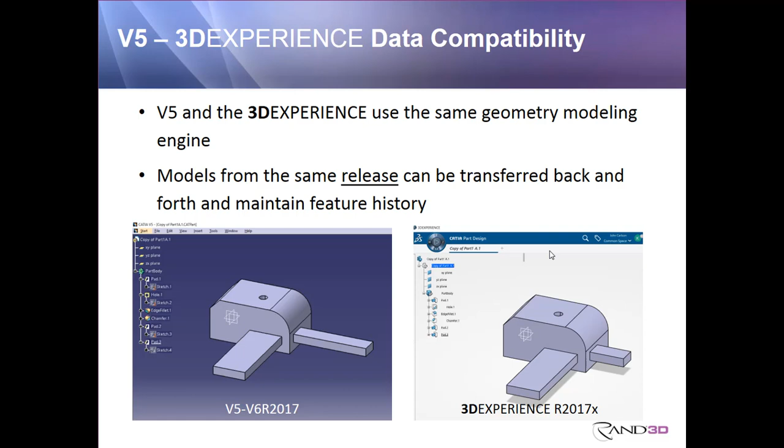Let's talk about on-premise first. With the on-premise method, basically everything is installed locally at your company - the software itself, the database you're using, the hardware, that's all within your company. That would be one way to do it. With that, though, you do have to set up everything, and it takes a little bit of time and effort to do that.

With the public cloud, basically everything is out on the web, so there's really no software that you need to install. Well, you have to install the thick client software, but you can download that right off the cloud when you need to use that part of the software. So there's really nothing you need to do beforehand - you would just log into the 3DEXPERIENCE. You're going to use the internet to access the public cloud, so everything is taken care of for you in the background.

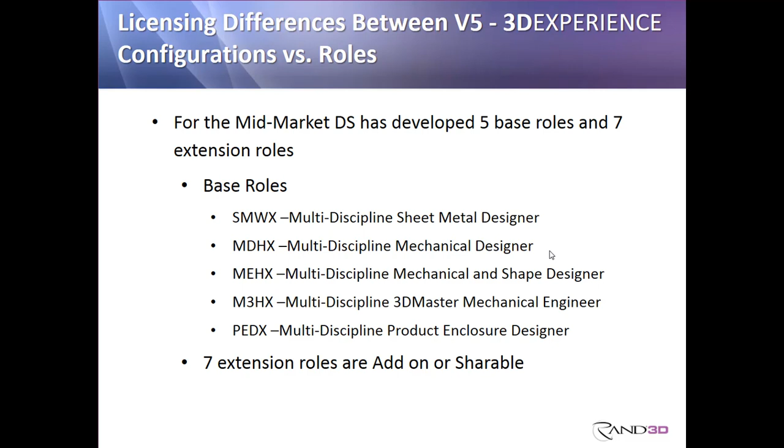And then from there, there's also going to be extension roles. So I could have an extension role for a tubing designer, or an extension role for electrical stuff added on top of those if I wanted to. I didn't list those 7 roles, but there are other ones you can add on top. These 7 extension roles can also be add-on or shareable on top of the base role as well. So you're still going to have the trigrams, but it's now going to be roles versus configurations that you bought in the past.

And then the next thing I want to do is give you a quick software demonstration. How does this software look compared to V5? You'll see there's quite a few similarities, but there's also going to be some differences as well. So let me bring that up here real quick.

I've actually already got CATIA started here in the background just to save some time. Now again, to get into the 3DEXPERIENCE platform, I have to specify a web address, and then it's going to ask me to log in. Once I log in, it would bring up the 3DEXPERIENCE. Now I'm in the thick client part of the software because I'm actually in CATIA right now, and you'll notice I do have my compass up here in the corner that I was talking about.

So again, if I wanted to switch the area that I was in, if I come over here and hit the 3D button, that's going to bring up, over here on the side, where I can choose my different 3D modeling apps. You'll also notice on the side panel I've got my different roles assigned to me. If I go under business innovation, here's the different apps I can access under that role. If I compress that back and go under mechanical designer, here's the different apps I can access as mechanical designer. So it will always give you a list on the side of the different roles you potentially have and what you can access.

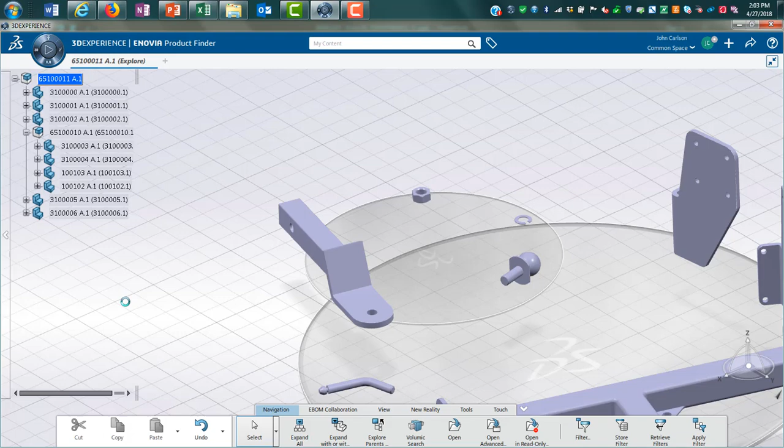Now you'll notice I've got a sub-assembly over here, which is this part. If I expand that as well, it would further expand that out onto the turntable. So I can break this down under Explore and really view the information. Then if I decide I really want to make some type of change, at that point you could open it. If I come over here and compress this, that would put these back together. This is not expanded out.

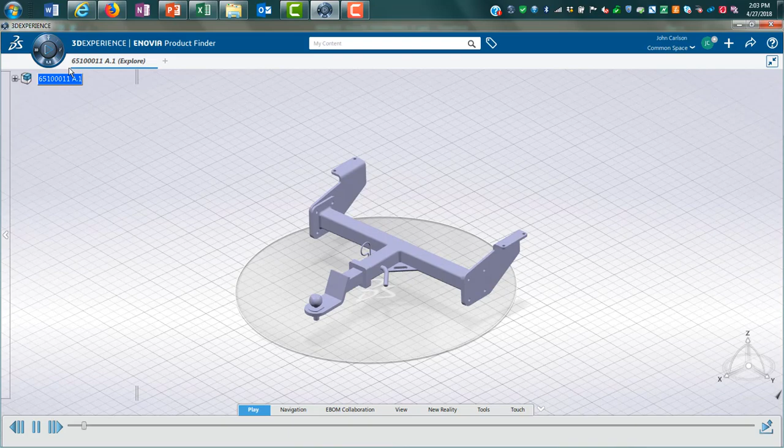So you get Explore options that you really didn't ever have in V5. Also in the very center of the compass, there's a 3D play button. If you're looking at something and you hit the 3D play button, it's going to play through the different orientations of this model to give you a better idea of what this particular item looks like. I can stop that at any time.

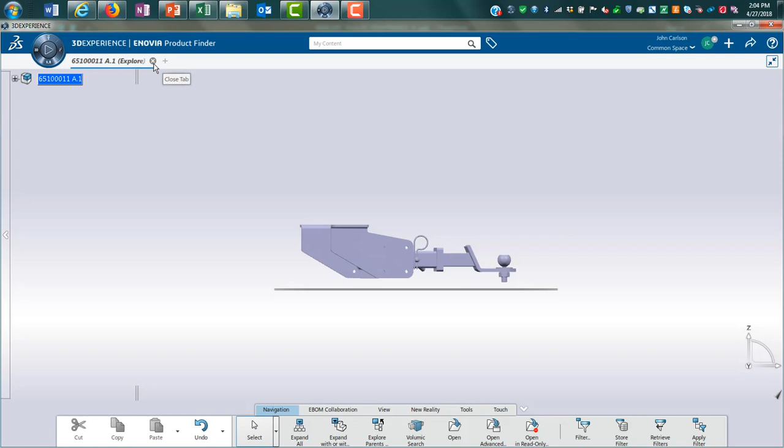Now I'm finished with this. Okay, I explored this, I looked at it, don't need to see it anymore. So I'd really just come up above and close that tab.

Now, if I want to create a brand new file in the system, I've got a couple different ways to do it. One is I could come over here and use my compass, and come down here and say I want to make a part. That would build a brand new part. Or I could just come up here above with the plus button, and create a model that way. So I want to go through and create what they would call a 3D part, and that's going to start a brand new model at that point.

And you can see once I get the model started, I still got the 3 default datum planes. I've got my specification tree on the side as before. And then down below, the interface has changed quite a bit. I do have various tabs down below here to find the different commands.

So if I'm over here under the Essential tab, these are kind of the essential commands inside of the 3DEXPERIENCE platform. If I come over here under Model tab, here's my main model tabs. If I come over here under Refine, that's where I'm going to find chamfers and edge fillets, those different commands. So it's really just a matter of going to the correct tab to find the command.

Now, some of these things are found in multiple locations. Like if I come over here under Essentials, I'm going to find the sketch command. I would also find that here under Model as well.

So let's just say I want to make a simple feature here. I'm going to go through and make a sketch. I'm just going to hit the sketch button down below, and that's going to start making my sketch. Once you get into the sketcher, you'll notice your choices are pretty much the same as you would see in V5.

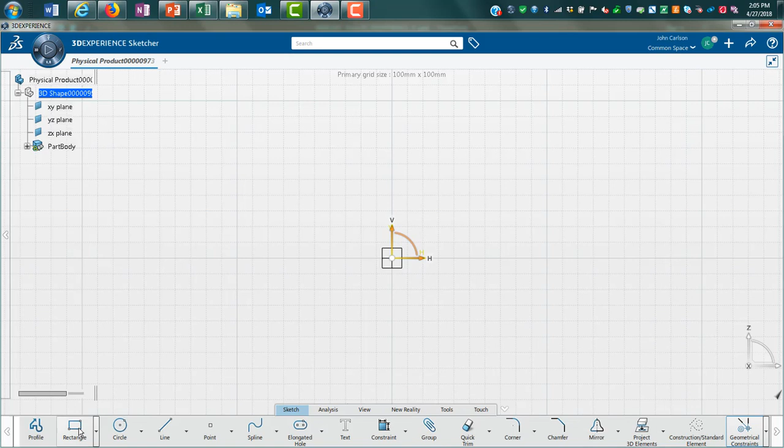So maybe I just want to come over here, I'll keep this simple. I'm just going to make a rectangle that goes from there, now drag that out over to there. And then once I've created my rectangle, I want to start to dimension that. So let me just shift this back here into the center.

And to go through and do that, I can still use the buttons at the bottom, but there's also a number of shortcuts they've added into the 3DEXPERIENCE platform. If I just pick on this element, it brings up a mini toolbar here. I can just say, hey, I'm trying to create a constraint here, and that would add a dimension. As soon as I put that dimension up, it gives me the opportunity to change it. Okay, I want that dimension to be 115 on there.

I could do the same thing over here again, pick on that entity. It brings up my mini toolbar, and yeah, I'm trying to make a dimension on that as well. So I can add a height dimension here real quick to do it. But it's essentially the exact same thing you would do in V5 as you're making the sketch.

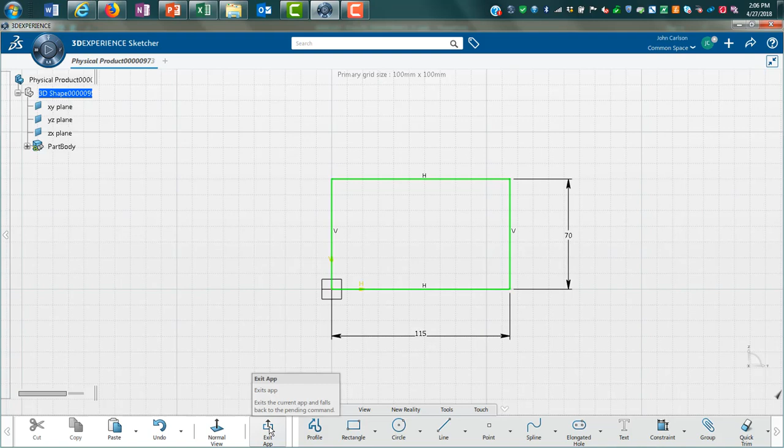Now, to get out of this, I need to come back over here, expand over a little bit, and say I want to exit the app. I really want to get out of the Sketcher app now, and that's going to create the sketch. And then at this point, of course, I can come down below and turn it into a pad.

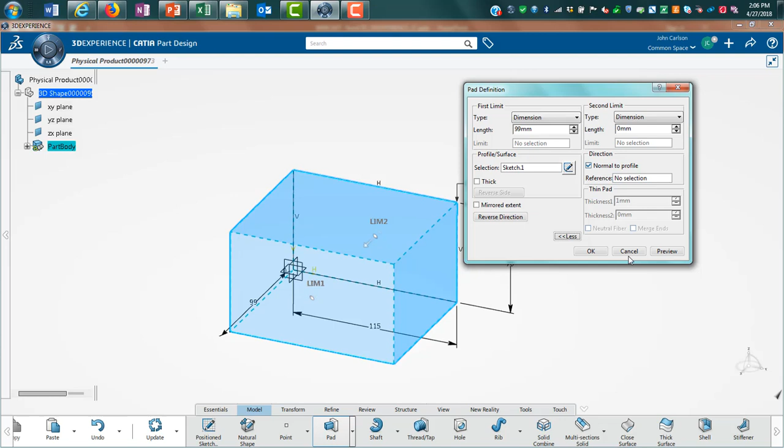Now remember, the basic geometry modeler is the same, so this really looks all the same. I've got the exact same choices over here when I say more inside of that dialog box that you would see in V5. And then once you've got your depth set, I can just go through and say OK, and that would create the pad. And of course, I can expand out my part body now to see that.

Now, if you wanted to add like a hole or a round, I could come down below here and just say hole. It would work essentially the same. Pick your face, and that's going to start the hole command. But once you get here, this is really identical to V5.

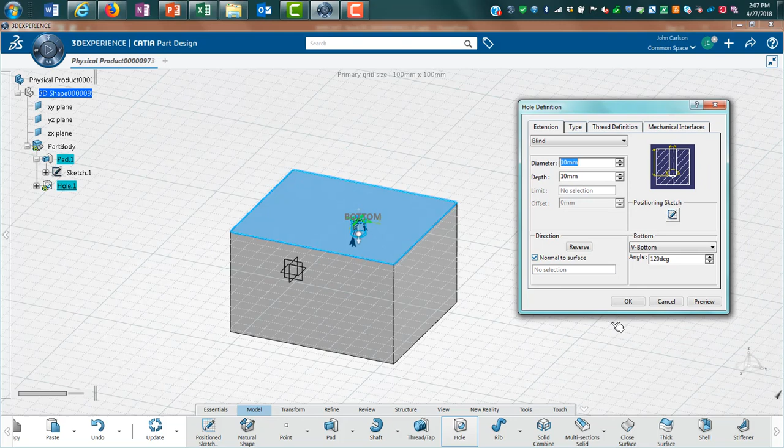So going forward when you're switching, the training portion is going to be minimal. Users that understand V5 are going to quickly catch on to V6. And again, to store, I can come up above here and say I'm ready to go through and store my model. So I want to hit save, and that would go through and save it at that particular point. So that's kind of the new look interface that you would see with the 3D experience.

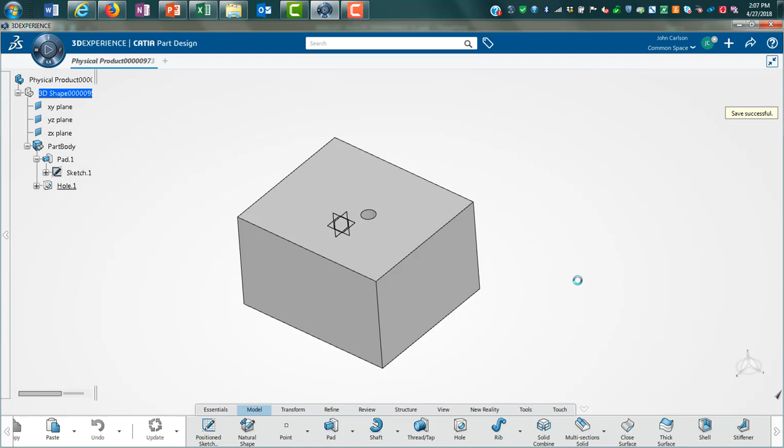The biggest difference is really just a matter of when you want to get a new file, I'm not going to hit the open button. I'm going to come up above here and search for the file to bring that item up. But once I've gone through and opened up my assembly, everything is pretty much the same as far as assembling parts and modifying things as it was in the past.

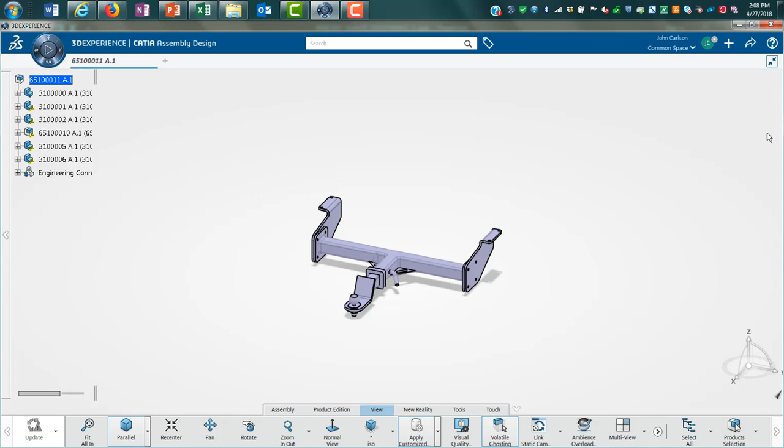Okay, so to finish off, let's come back here and talk about a couple things. I want to bring my slides back up here really quickly. We looked at the quick software demonstration.

As a summary, really the 3D experience is just an evolution of CATIA V5 from being a file-based storage format to being a database format. And being in that database format just gives you much more access. All the other apps can easily access this information and make changes to it directly, and I don't create those various different kinds of silos of information that you might have with a file-based system.

And then the Rand 3D industry focus: we focus on aerospace and defense, industrial equipment, high tech, and also transportation and mobility. So those are our focus as a company. If you have questions outside of that, we may be able to answer them, but we may also have to point you in another direction. If you're outside those areas but still have questions, feel free to contact us and we'll step you through and find somebody who can answer those questions if we can't.

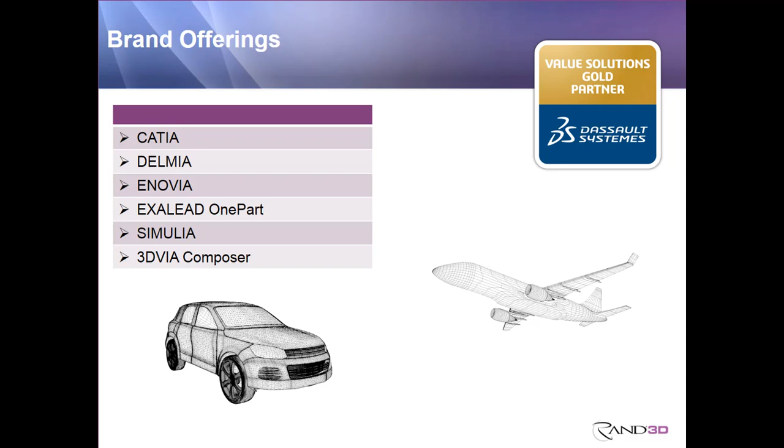I just want to talk a little bit about our brand offerings as a company. We go through and deal with these brands: CATIA, Delmia, ENOVIA, Exalead, SIMULIA, and also the 3DVIA Composer products. Those are the brands we concentrate on as a company.